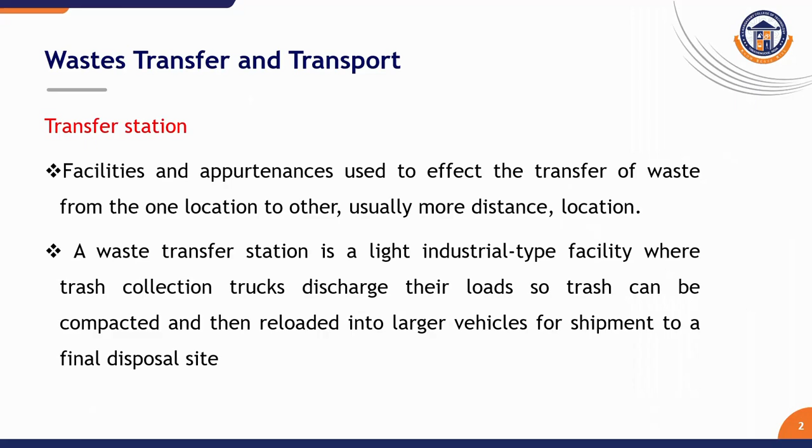A waste transfer station is a light industrial type facility where trash collection trucks discharge their loads, so trash can be compacted and then reloaded into larger vehicles for a shipment to a final disposal site.

Why do we need transfer station? We need transfer station when the disposal site is far away or in a remote area. Also, in cities with heavy traffic, it saves time.

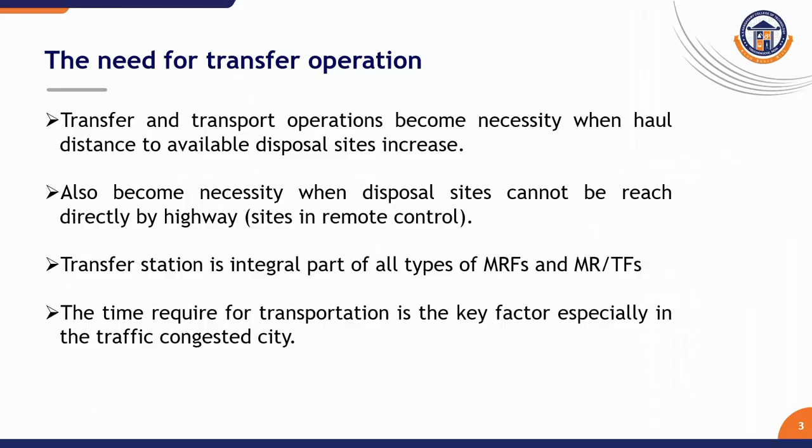Transfer stations are also part of MRF, material recovery facilities, where waste is sorted and recovered. Transfer station is integral part of all types of MRF and MRTF. The time required for transportation is the key factor, especially in the traffic congested area.

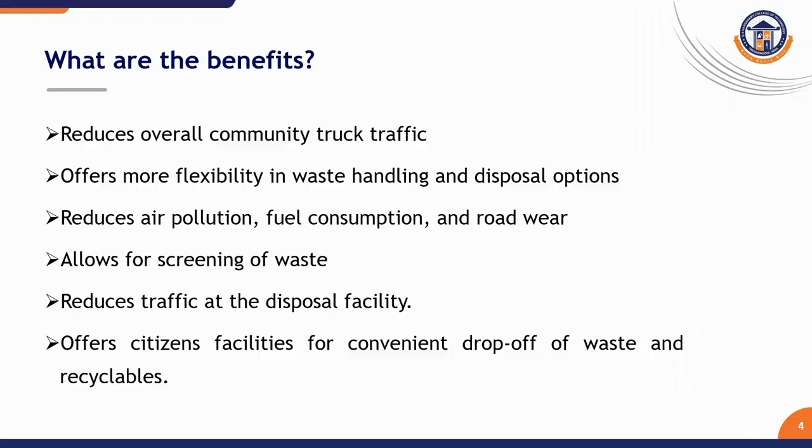Benefits of transfer station. There are many benefits. Less truck traffic in the city, lower air pollution and fuel use, roads get less damaged, waste can be checked or screened, disposal sites are less crowded, public can use them to drop off their waste and recyclables easily. Allows for screening of waste, reduces traffic at the disposal facilities.

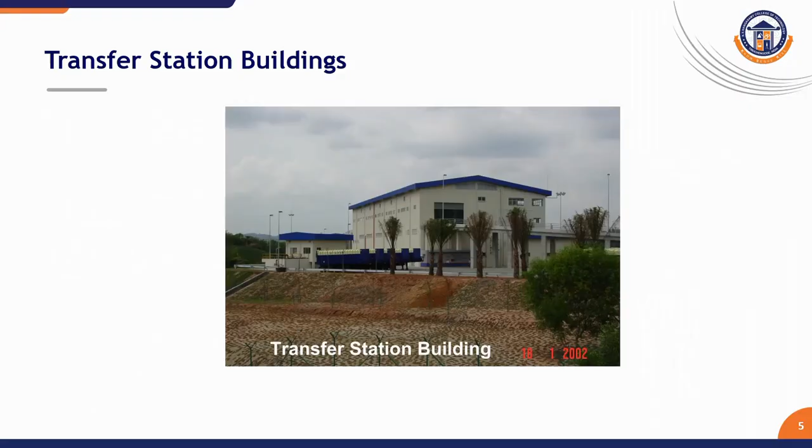Transfer station building. These are designed like small industrial buildings with space for trucks, compactors and sometimes even sorting equipment. The picture clearly shows the transfer station buildings.

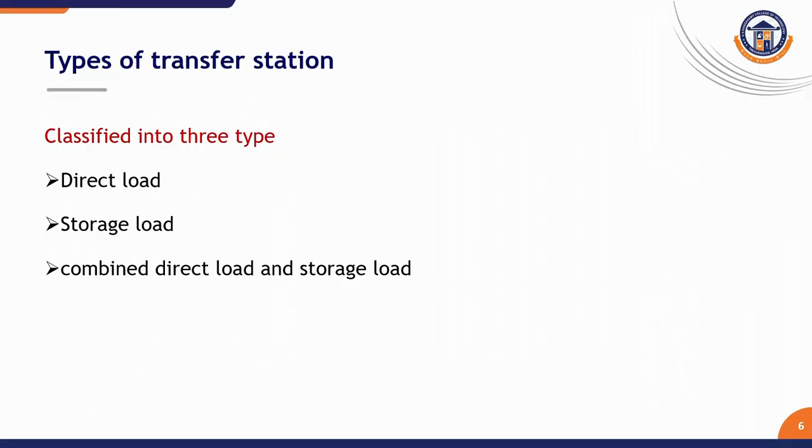There are three main types of transfer station: direct load transfer station, storage load, and combined direct load and storage load. Direct load transfer station. In this type, the waste goes straight into bigger transport trucks. The small stations use open top trailers and large ones may have an unloading platform. Then the waste is loaded into the next truck.

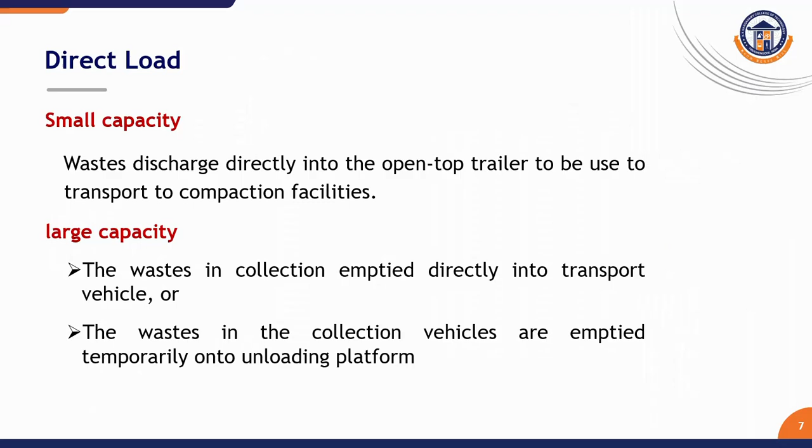In larger capacity, the waste in collection vehicles is emptied directly into the transport vehicle, or the waste in the collection vehicles is emptied temporarily onto an unloading platform. The second classification is storage load.

In storage load stations, waste is dumped into a pit and kept for a short time. Then with special equipment it is loaded into large trucks. The big advantage is the ability to store waste temporarily. The difference between direct load and storage load is the capacity to store waste.

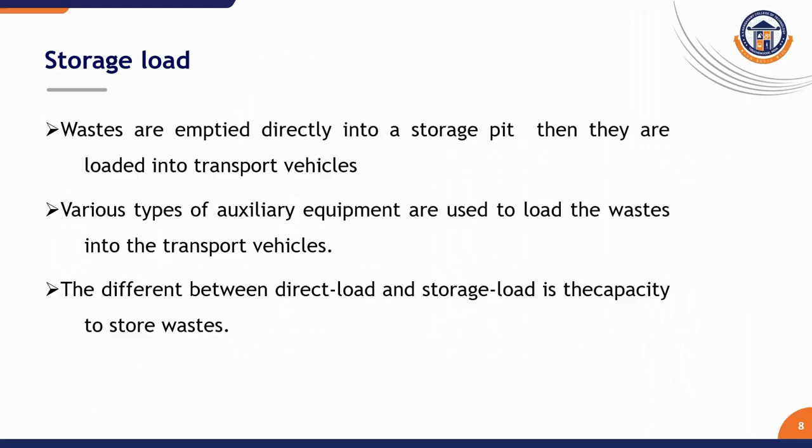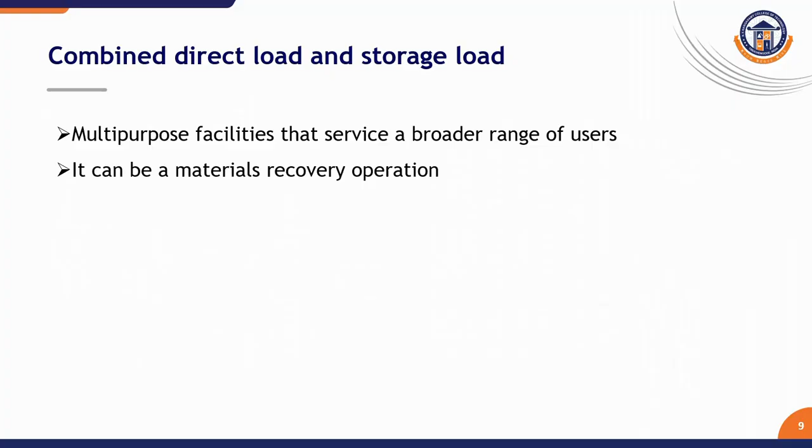The third classification is combined direct load and storage load. This type combines both direct and storage methods. It is useful for multiple users and may include material recovery operations like separating recyclable materials.

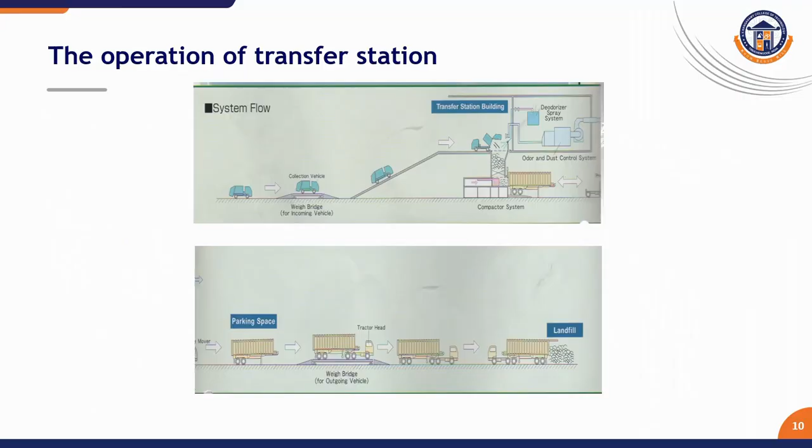What are the factors to be considered for location of transfer station? When choosing a site, we consider the following points. The site is as near as possible to the collection area, easy highway access, safety for people and the environment, compare cost, vehicle size, storage space and the traffic flow, time required to unload the collection trucks, number of trucks that will use the facilities.

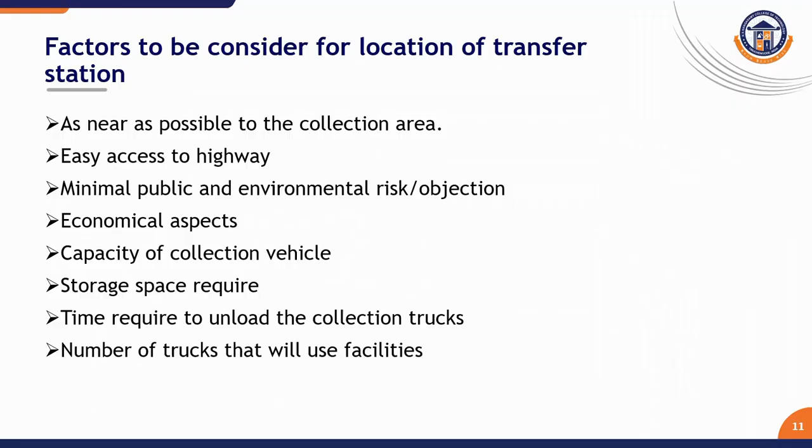The next one is site selection. Site selection depends on technical, environmental, economic, social and political factors. So we consider the technical factors like soil condition and access, and environmental is the pollution of water or pollution of land, which we should consider before selecting the site.

Then economic, the cost comparison is very important to select the site for transfer station. And social, before going to select, a public opinion is needed for selection of site. And political, we need government support to select the site.

Motor vehicle transport: compactor. Compactor trucks are commonly used for door-to-door collection. They compress the waste to carry more. They usually have a capacity of 12 cubic meters and are used for compactable waste.

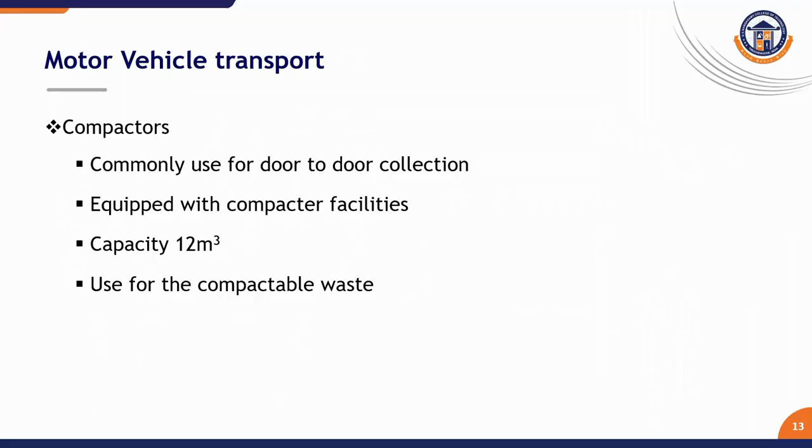Roll on and roll off, RORO. Good for bulky waste in commercial areas. Top open truck used for commercial and residential areas for bulky and uncompactable waste. The second one is side loader, normally used without compactor for manual door to door collection in residential buildings.

Open trucks are used for transporting bulky and uncompactable waste, used for door to door collection, not recommended for garbage and refuse. For bulky waste but not ideal for garbage. The last one is hand carts, commonly used by street sweepers in cities.

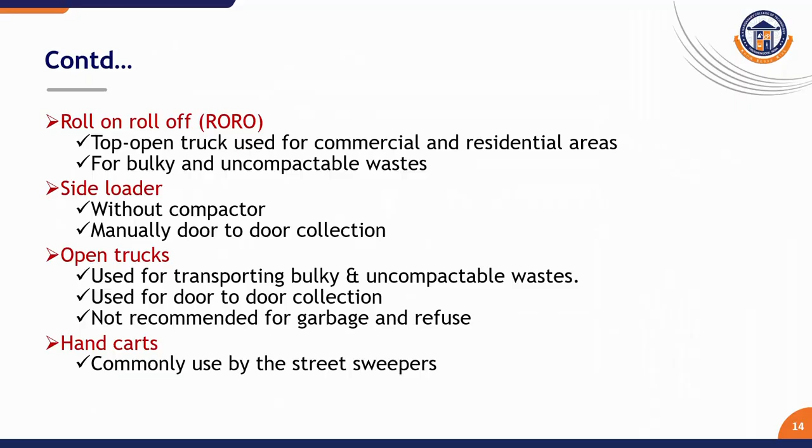So these are the vehicles normally used to collect the solid waste and transfer it from the collection site to the transfer station, and finally the solid waste is disposed of into a vacant land or landfill site.